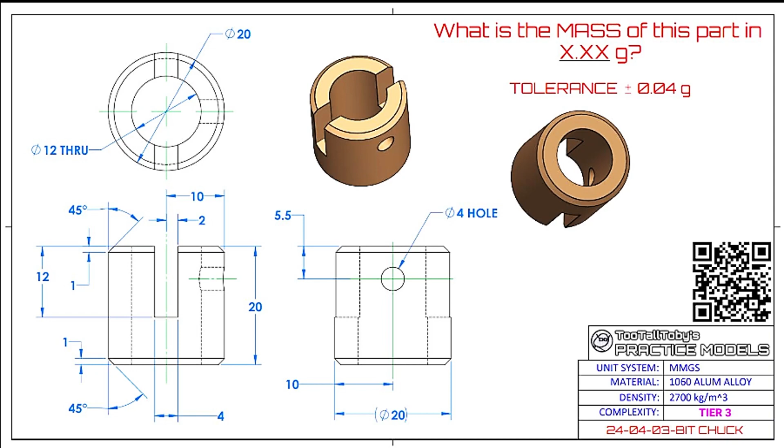Okay, we're starting in a new part studio. In the hamburger menu, the workspace units, millimeters, 1 decimal place. Under mechanical mass, we'll go to grams with 2 decimal places, green check mark, and we're good to go.

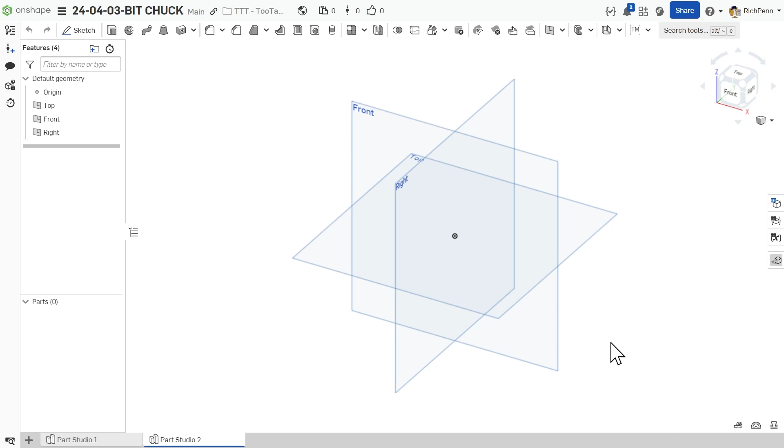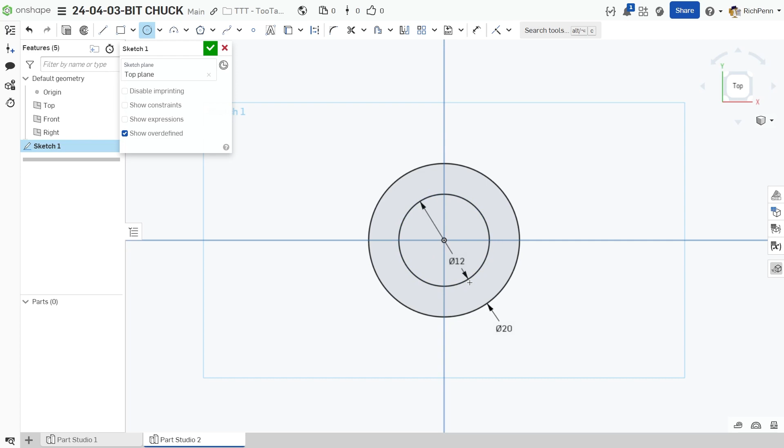Now, if we start on the top plane for our first sketch, normally we would just do a Shift S to get into the sketch mode, and we would come out here and we would pull a 20 millimeter circle. And then we would pull a 12 millimeter circle, which is the inside. And we would save that and do an extrude of that, and we would do it up 20. And that would be our first part.

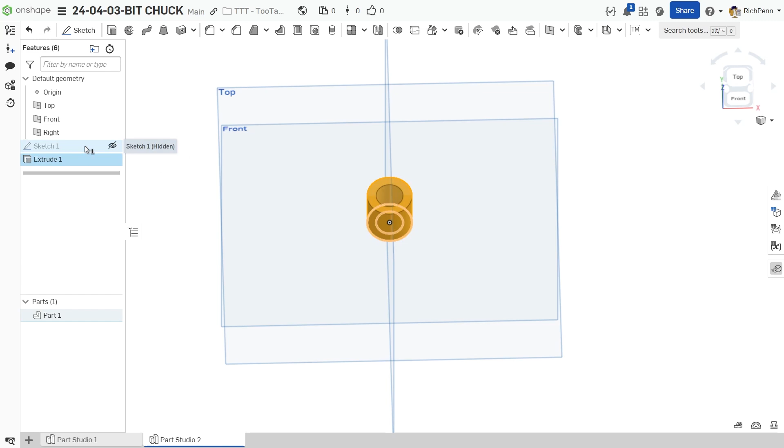Now, the problem we've got is to get this slot, we have to either draw on this surface or offset one of these ordinal planes to get to where we can draw a slot. The other option we've got is much simpler, but let's wipe all that out and I will show you a different way to do it. We will start on the top plane with a sketch, and we will draw the circle off center. We'll pick a spot anywhere, pull to the origin, click, and then type 20, and that will set the center to where you want it.

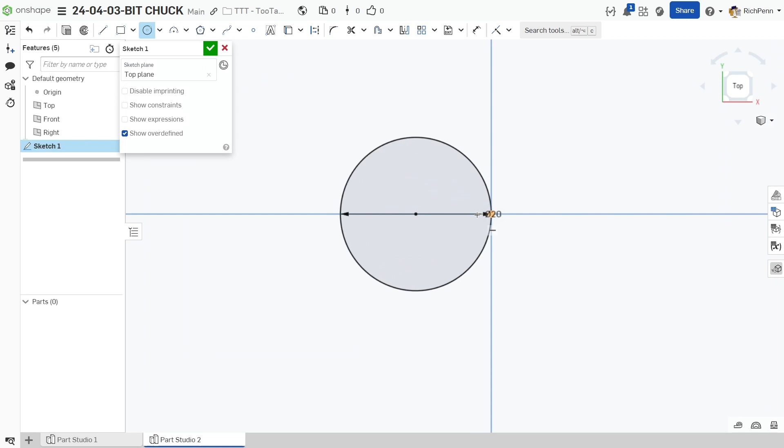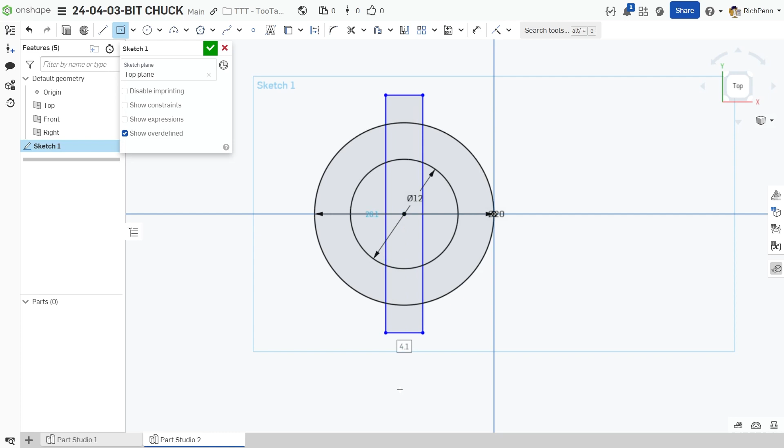Pick 12 from the center. Now, we're going to draw the slot while we're here, and the easy way to draw the slot, instead of drawing parallel lines and all that, is simply go up here to the center point rectangle tool, catch the center of the circle, pull up, pull out, and click. If you hold your mouse at the bottom, you can type in 4, which is the width of the slot, and then it will highlight some number to the size of the slot. You really don't care, just hit enter a couple of times. It will turn black and everybody will be happy.

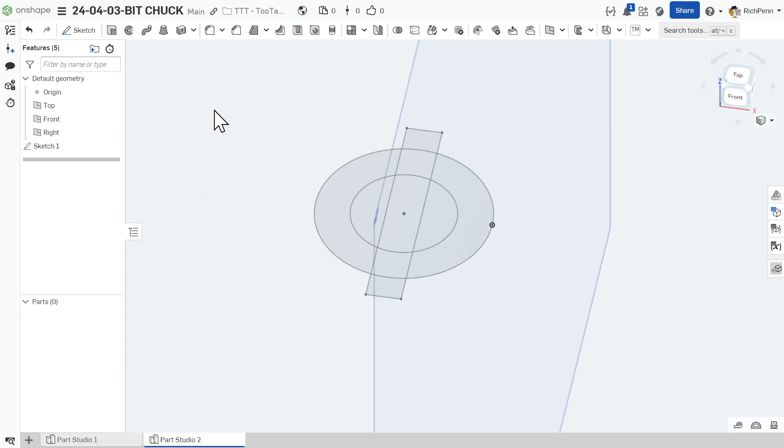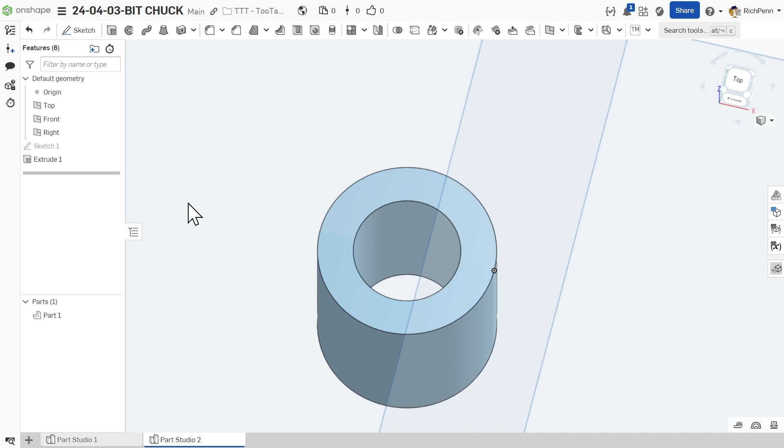Now we can close the sketch. We can go to extrude. We can pick the 2 halves of the circle, plus this part, and go down. I will show you why we're going down in just a second. We're going down 20, and that is our part. Now, if we re-enable the sketch, we can simply do this and that, do an extrude, do a remove, and the distance for that is 12, and we're through with the slot. That's all there is to the slot.

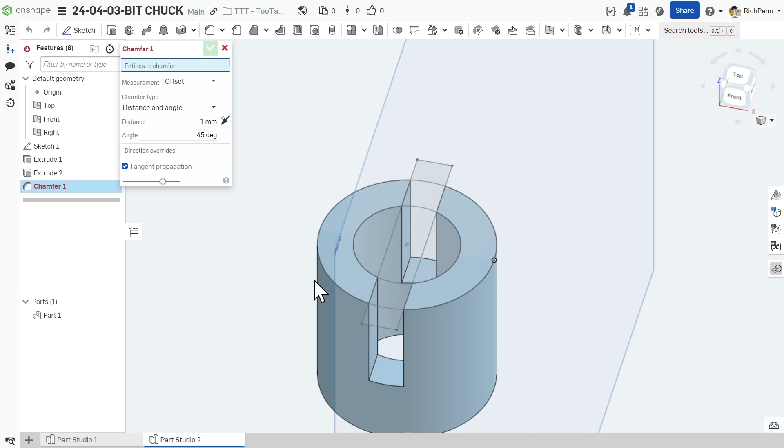If we go to the 1 millimeter chamfer, we can touch this edge, that edge, and we have our chamfers finished. Let me turn off this sketch to get it out of the way. The only thing we lack is this hole.

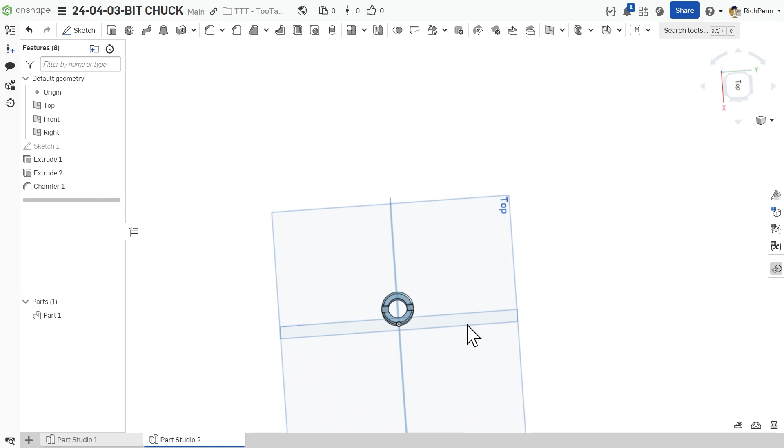It just so happens that the right plane is tangent to the side of that because that's the way we drew the first sketch. So we're going to go sketch on the right plane, do a normal. We'll zoom in a little bit. The size of the hole is 4 millimeters, so we'll set the center line, pull out, type in 4.

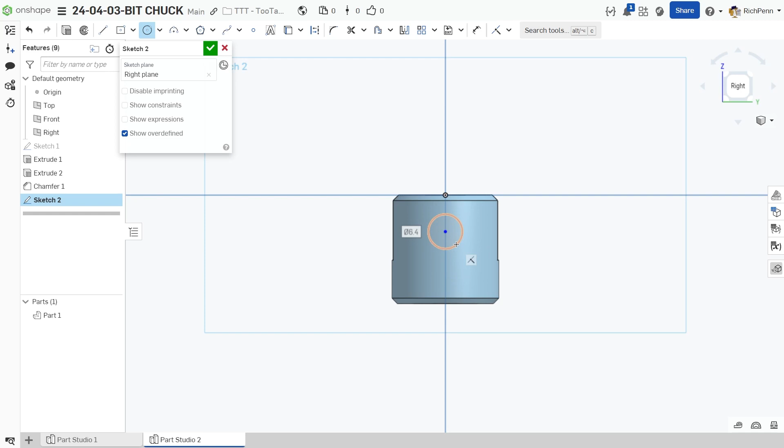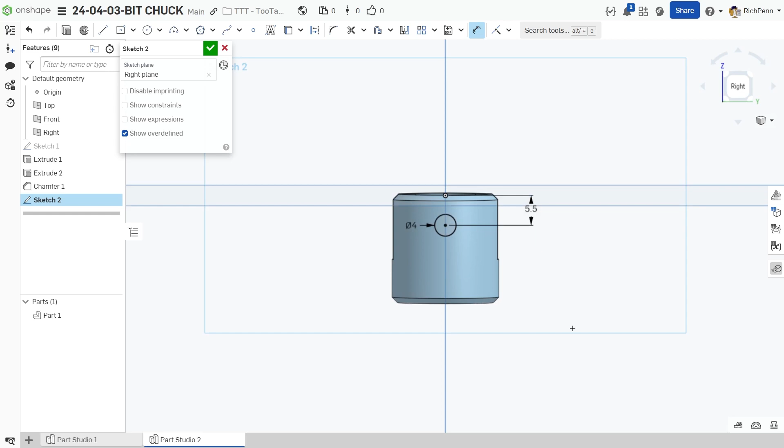Now, this is an interesting discussion. Do we dimension from the top or the bottom? Well, the engineer has chosen to dimension from the top, so we can assume that the critical dimension for this hole will always be 5.5. That way, if the top grows, if he makes a longer part, the hole will follow it up because the critical dimension is always to the top rim.

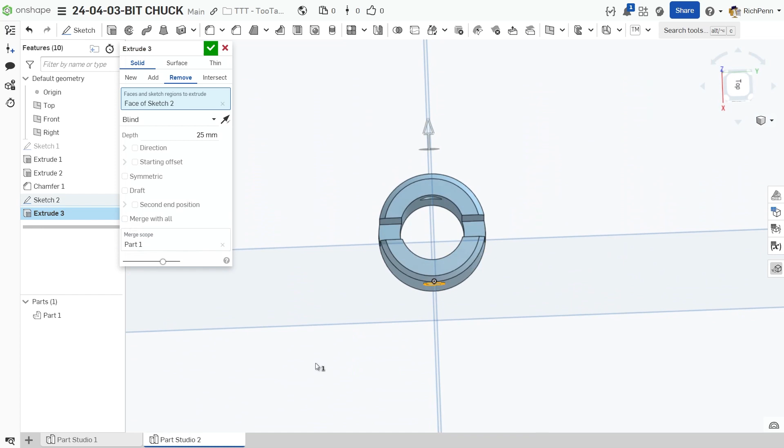So now that we have the sketch, we can close it, we can go back to extrude, we can select remove, we can pick the hole, and you'll notice it goes all the way through, but we can prevent that by changing blind to next. What that means is it will go through the first side, which is this side, and it will stop before it comes to the next surface, which is this side.

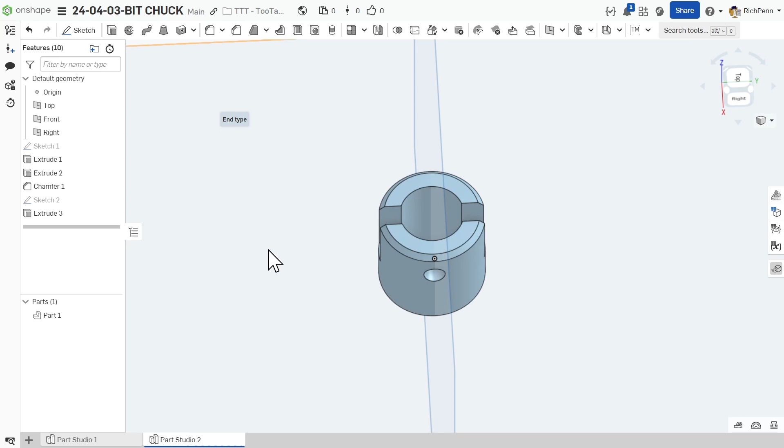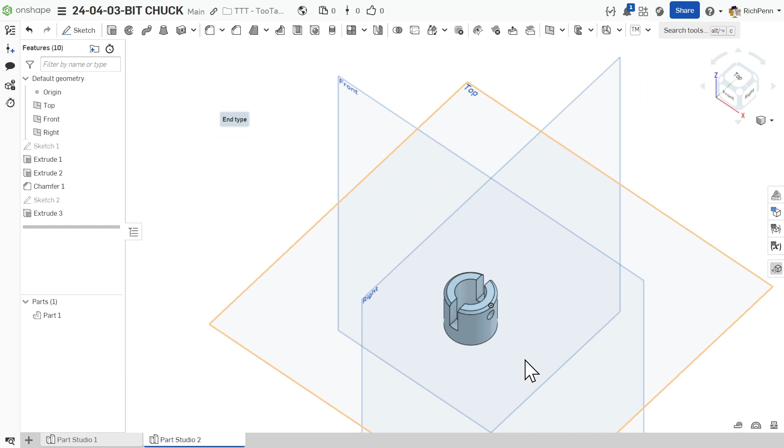Huge advantage here. No matter what size this bushing is, as engineering changes it, we will always have a hole only through one side, and we never have to worry about either the hole not going all the way through or the hole going through the other side, because it's now dependent on the other geometry. That's the advantage of parametric engineering as opposed to what you and I would probably call regular engineering or discrete components or whatever. Anyway, that's the quick way to draw this part.